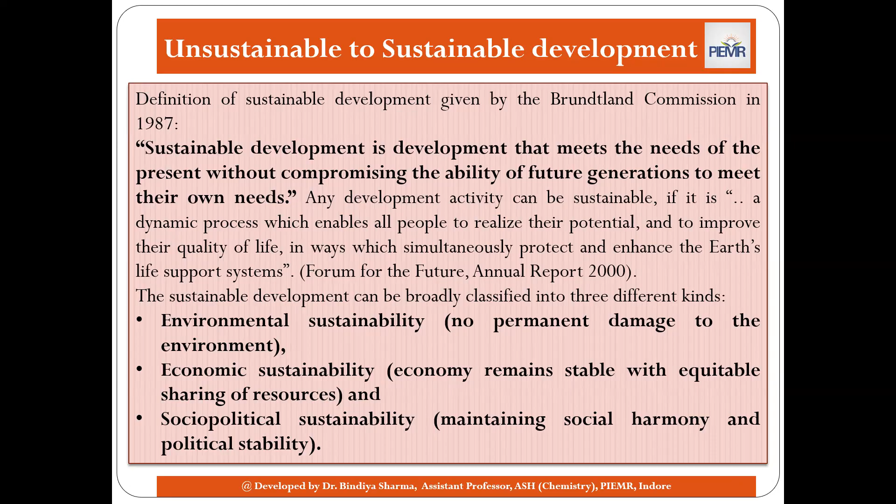Now, when we talk about environmental sustainability, there is an urgent need for water conservation, as the world faces an increasingly critical need to address climate change. The impact of water conservation on a sustainable environment is undeniable. We cannot deny that we have to conserve the groundwater and the water available to us on earth. Groundwater is a primary source of fresh water.

It caters to the growing demand of industry as well as domestic use. But it is observed that we are exploiting groundwater resources for our daily needs, and therefore it is declining day by day. We are finding scarcity of fresh water. Though many technological devices are being developed to minimize wastage, our own contribution is needed if we want to optimize groundwater use, especially for day-to-day activities.

So we need to conserve water at an individual level also. Our water resources are depleting each year, and it is not possible for us to generate artificial water. We are still dependent on the natural water available to us as rain. We use so much water, and on earth we don't have much fresh water supply.

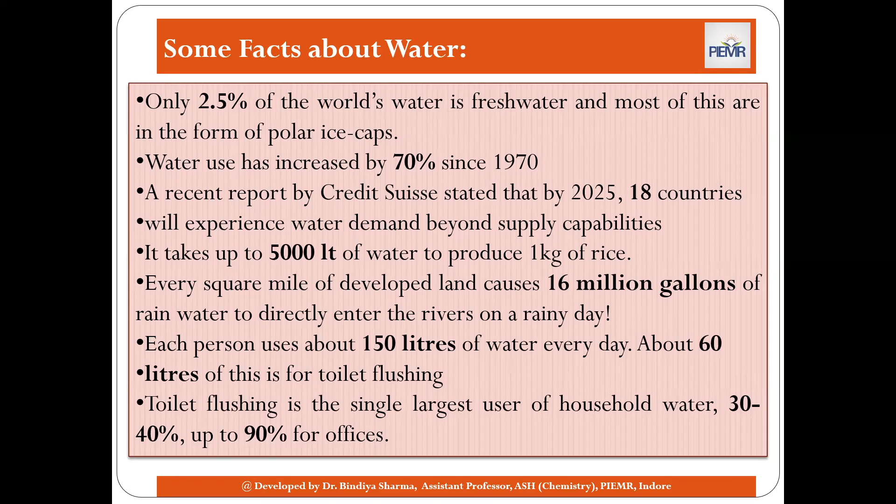Mostly the water is in the form of frozen ice. The water present in the seas and oceans cannot be used directly because it is saline. So we are using so much water and we cannot generate water. Whatever present water resources we have for fresh water, we have to conserve them. Although much water is available to us on earth, we cannot use it. So whatever small percentage of pure, fresh water is available for human beings, we need to protect, conserve, and control its use.

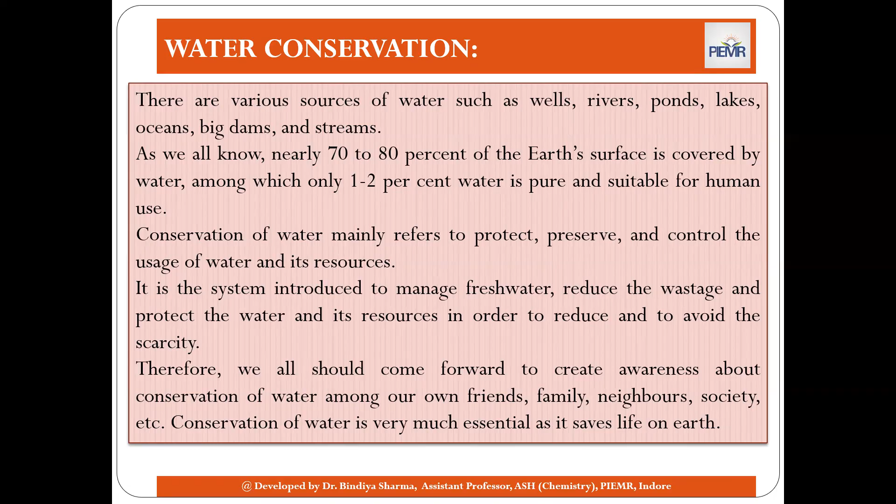And we have to take care of its resources also; it should not be polluted. That means we have to manage fresh water resources. By doing small actions in our day-to-day life, we can conserve water. For example, we should not waste water, and the leakage of taps should be taken seriously and rectified.

We should try to avoid wasting water, and we should try to recycle water and use it for washing or gardening purposes. We should first try to reduce wastage of water and conserve it. As long as we need water, the same amount of water should be judiciously used.

So even farmers, for their irrigation land to grow crops, require water. They can also use some techniques which help to conserve water.

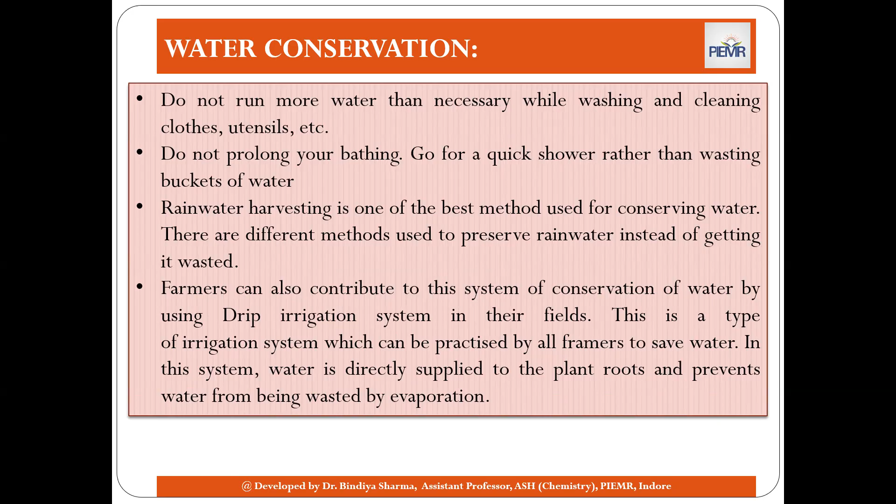This is a term called rainwater harvesting. Rainwater harvesting is a strategy by which rainfall is gathered and stored for future use. This process involves the collection and storage of rainwater with the help of an artificially designed system that runs off the natural catchment area.

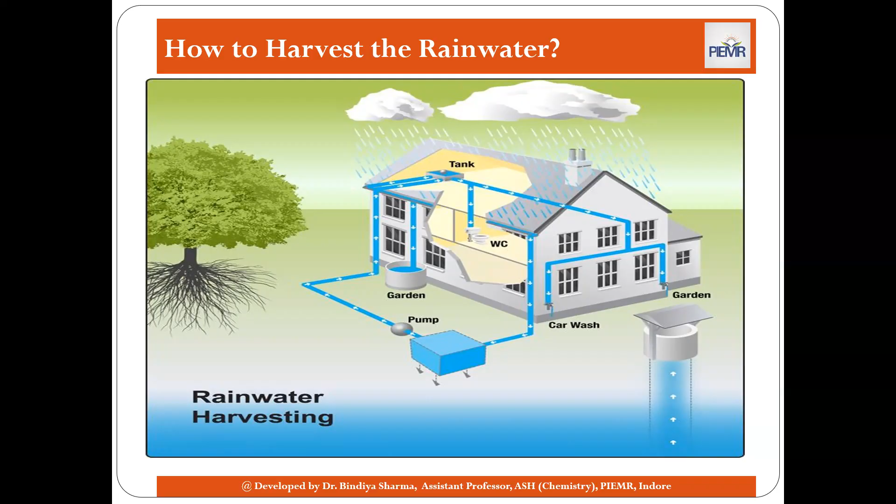For example, the rooftop — mostly water flows from rooftops, rocky surfaces where water cannot be absorbed, or some kind of semi-pervious land surface. The collected rainwater from all these surfaces can be filtered, stored, and later utilized. In simple terms, we can say that we are recharging the water. So if we can recharge or harvest the rainwater, it becomes easy for us to use it in the near future.

Rainwater harvesting is a very smart process because it does not contain any kind of impurity. It does not cost us more, and it is a no-maintenance process which can be easily done, even at our homes.

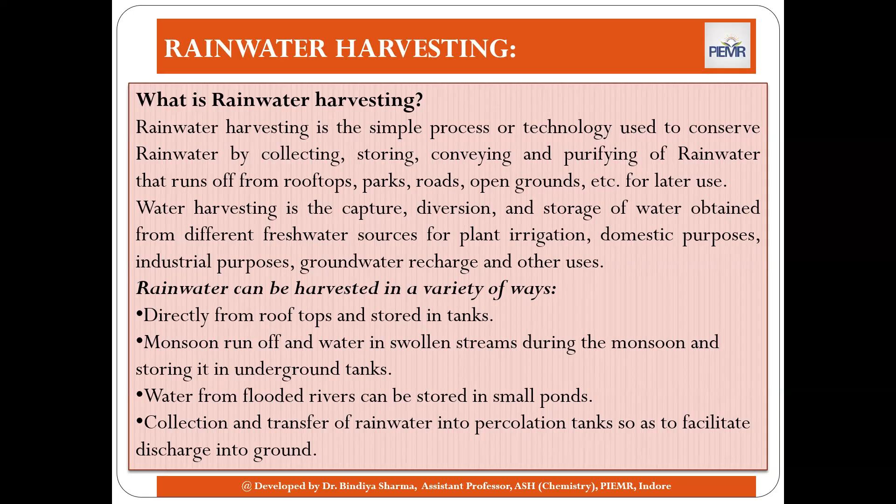Rainwater can be harvested in a variety of ways, like directly from rooftops or some kind of catchment areas. Monsoon runoff and water from flooded rivers can also be harvested and stored. Similarly, from percolation tanks, water can be stored and then discharged into the ground. This image depicts how we can harvest rainwater in our homes.

These are all the collecting areas. Finally, from all the collecting areas, through a common pipeline, during rainfall season the water is stored in a storage tank, and then it is let into the recharge facility, where a pit is dug deep inside.

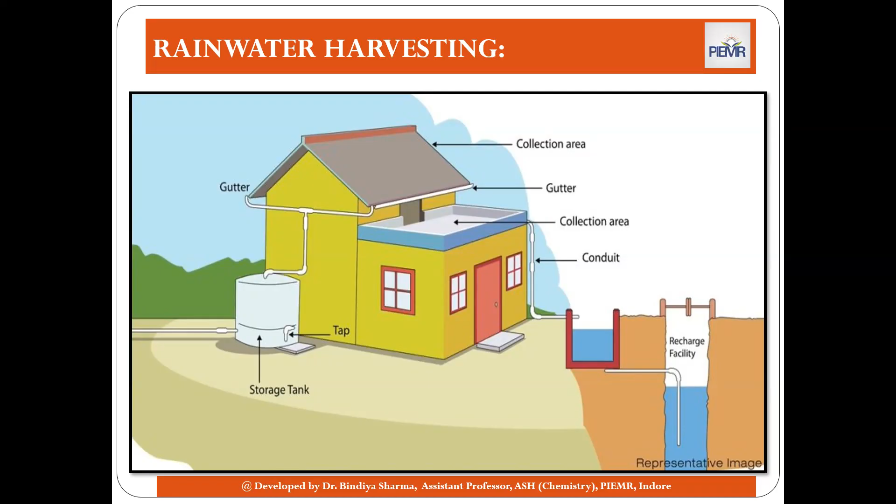Because of this kind of rainwater harvesting, the underground water is always maintained, whereas generally we are losing underground water, and the shortage of underground water can easily be seen during summer season. So these are a few of the principles of water harvesting and conservation.

If we want to manage water effectively, here are the steps we can follow. One is the use of rainwater - we can effectively use rainwater, as we have discussed, even at our homes through the water harvesting process. Storage techniques will give us availability or supply of water in summer season. These are a few techniques by which we can use rainwater effectively through rainwater harvesting.

We can also make effective use of soil water reserves. In the irrigation process, we can use some contouring practices which will help conserve water. We can avoid runoff of water through plantation of trees, by the process of contour pits, bunds, etc. We can also avoid wasting water through evaporation, that is, from barren land.

From the barren land, if the rainwater penetrates deep inside the earth, then the underground water level will always be maintained. But if it does not penetrate and simply gets wasted, then we face scarcity of water. We can also use drip irrigation, which will avoid wasting water during irrigation.

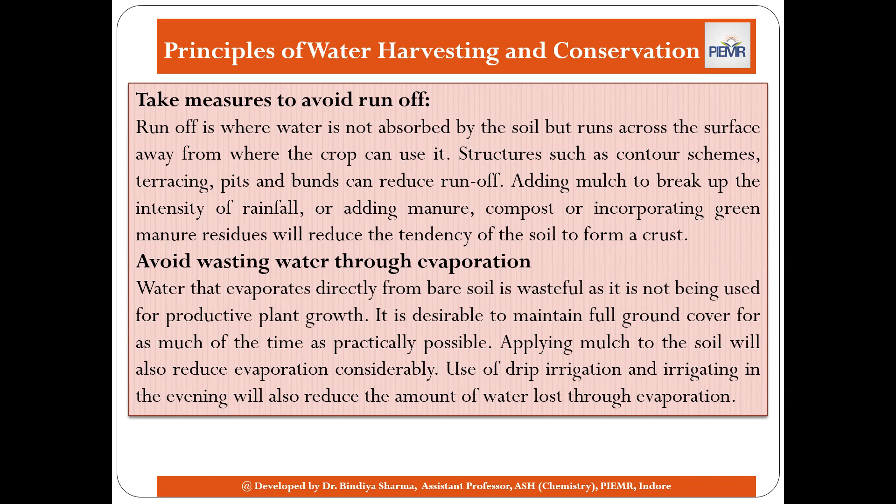We can also reduce water losses through drainage. If we maintain our drainage properly, we can reduce water loss. When the soil is sandy, it is not capable of absorbing much water. So in order to maintain soil fertility and convert sandy soil into fertile soil, steps can be taken. This is how we can conserve water.

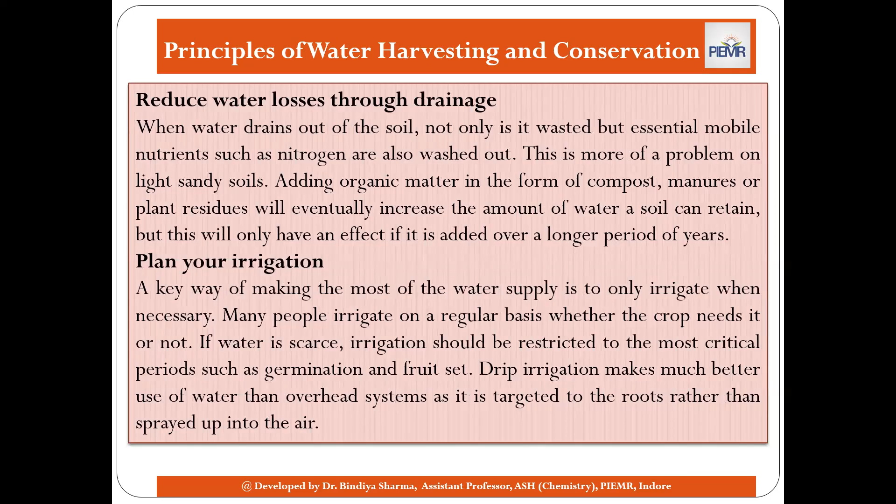If proper irrigation facilities or planning of irrigation is done, much water wastage can be avoided. Let us see how. Now, let's look at how we can plan irrigation.

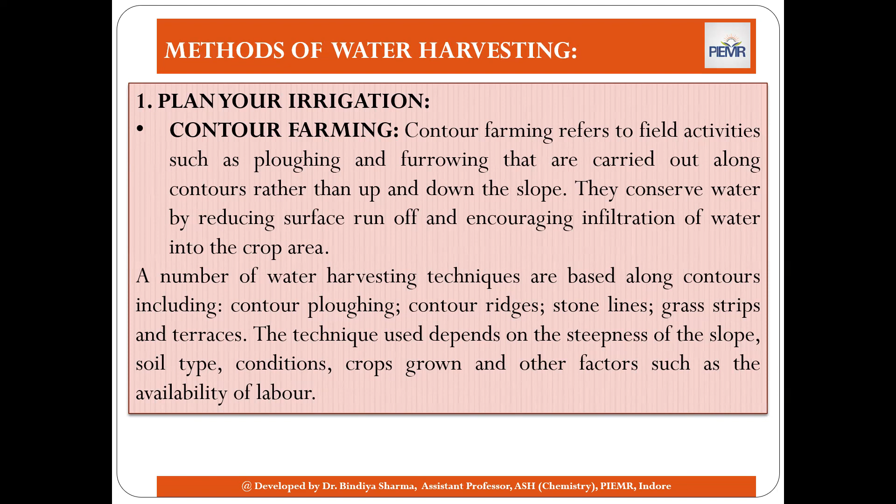First is the method of contour farming. Contour farming refers to field activities like plowing and furrowing which are carried along the contours. By this process, we can conserve water and reduce surface runoff in irrigation land. Some methods related to contour farming are contour plowing, contour ridges, stone lines, grass strips, and terrace. Let us see how contour farming can be carried out.

We can also form retention ditches where flowing water can be collected. We can also have contour furrows where runoff water will not cause wastage and can be easily collected.

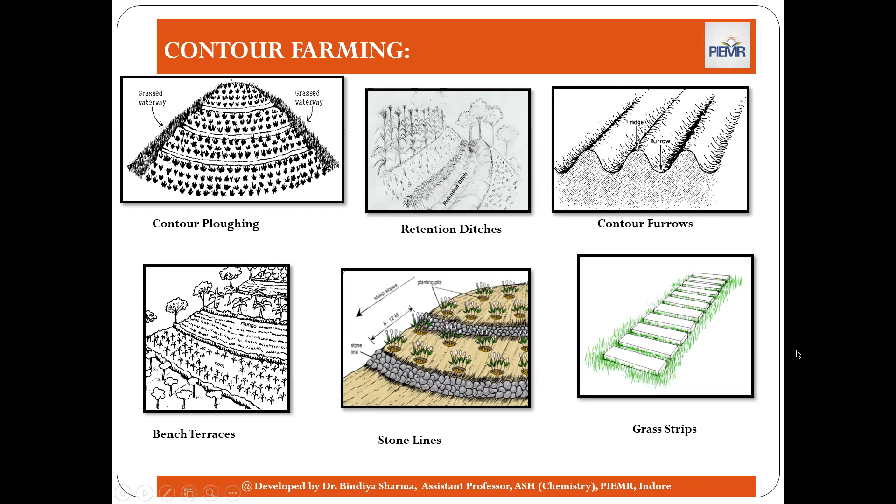We can also have bench terraces, a kind of step farming where we can grow a wide variety of plants and trees. We can also go for stone lines, having a boundary of stones so that water is not wasted and runoff can be prevented. We can also use grass strips, especially in areas like gardens, so that more water will be absorbed.

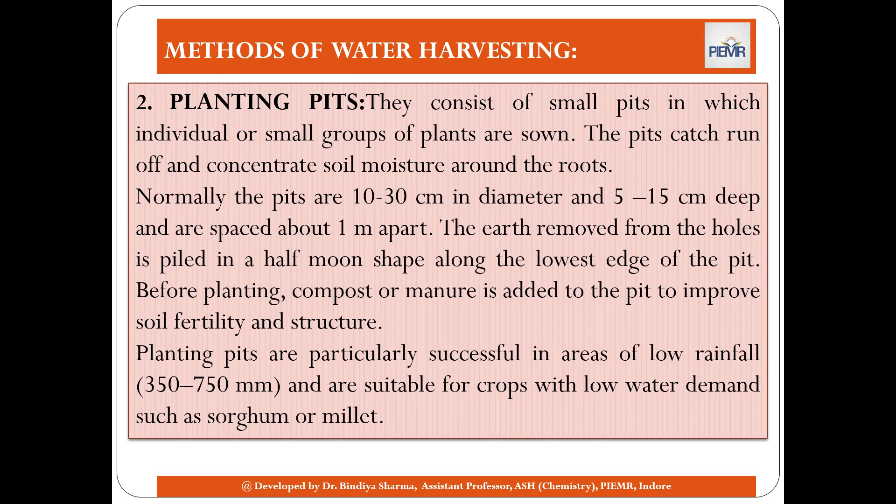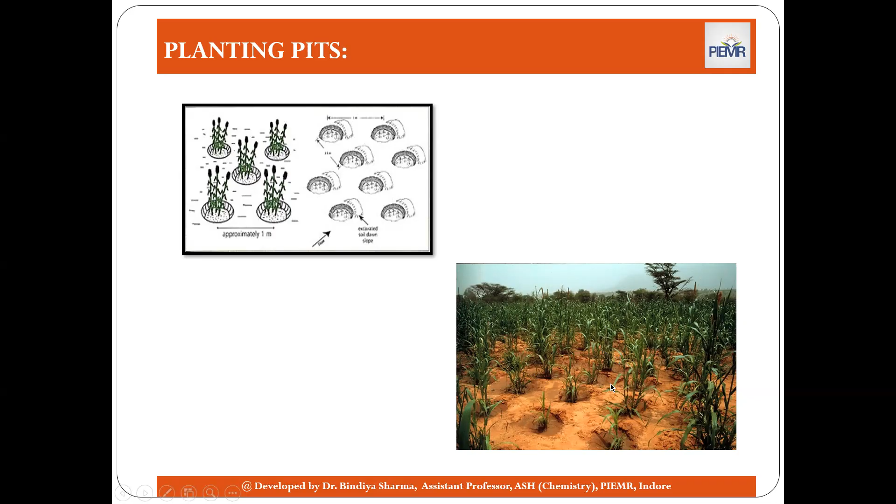The second method includes planting pits. They are small pits, individual or in small groups, where plants are sown. These pits are particularly successful in areas facing low rainfall and are suitable for crops like millet. This is how planting pits are formed and used for irrigation.

The next method is the earth basin.

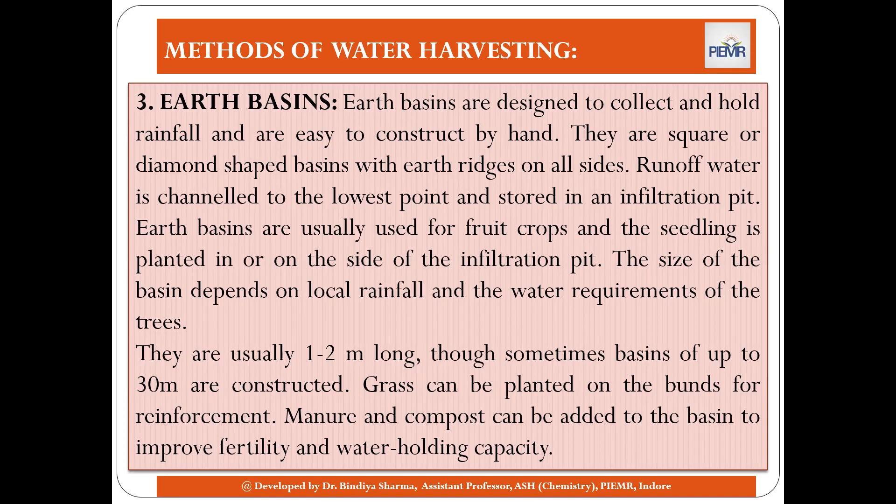They are designed to collect and hold rainfall water and can easily be constructed in whatever shape we want, especially square and diamond shaped basins. They are usually 1 to 2 meters long and range up to 30 meters. Grass can be planted on these basins, and manure and compost can also be added to improve fertility and increase water holding capacity.

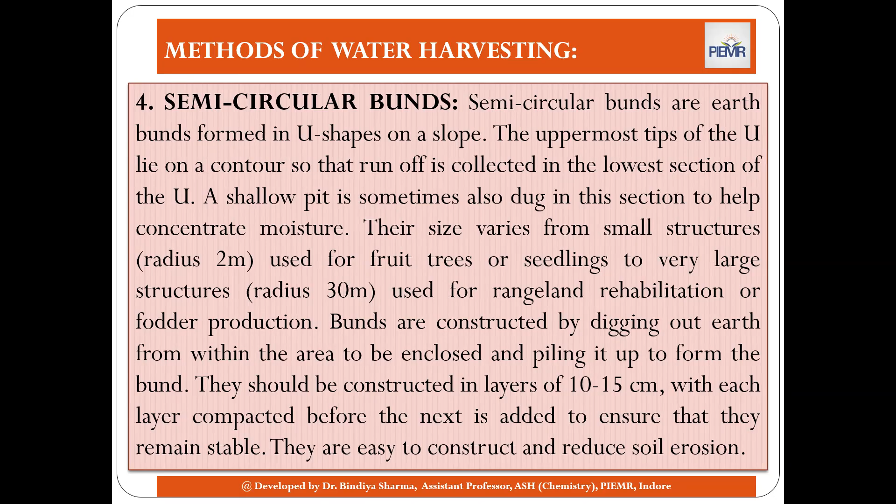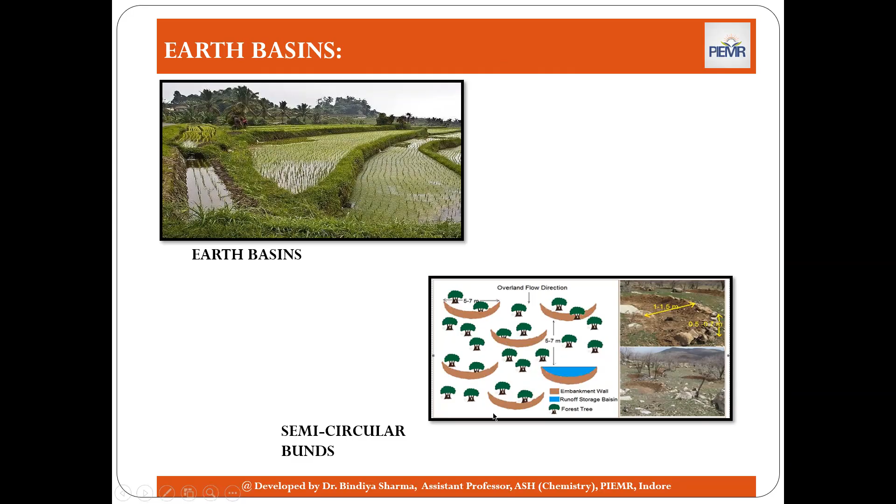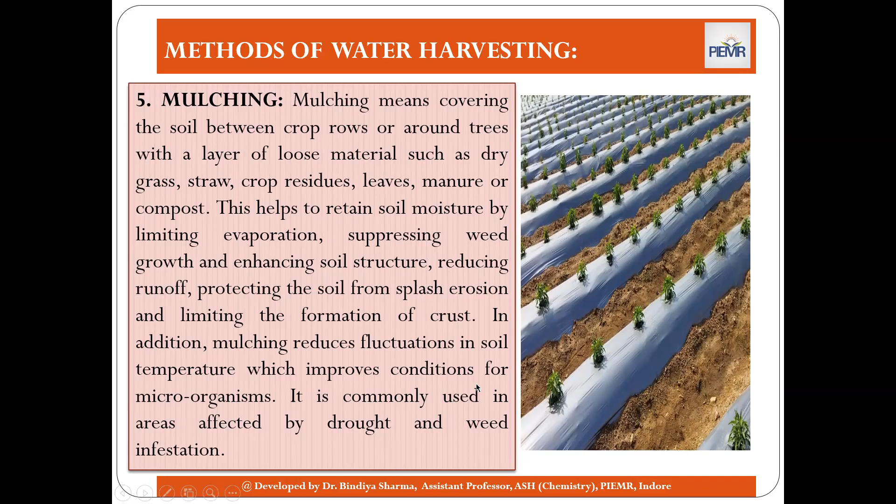Next method for water harvesting is mulching. Mulching means covering the soil between crop rows or around trees with a layer of loose material like grass, straw, leaves, manure, or compost. By doing mulching, it retains soil moisture because it won't allow much evaporation to take place. It also improves soil structure, reduces runoff, and protects the soil from getting eroded. This image shows how mulching can easily be done in irrigation land.

One common and very important technique used for water harvesting in irrigation is drip irrigation. It helps conserve water as water seeps slowly out of small holes in a pipe placed on the soil surface. The holes are located very close to the plant so that not much water is wasted, and the wastage of water can easily be avoided by using a drip irrigation system.

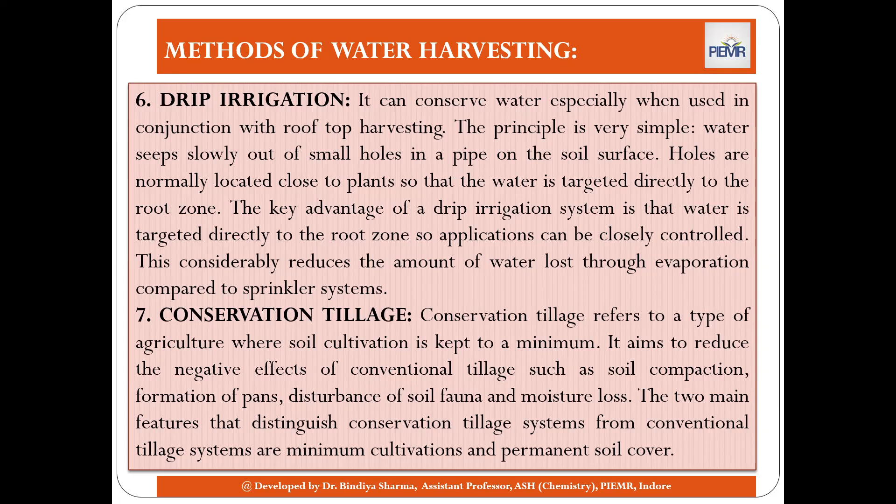Coming to another method of water conservation or rainwater harvesting, it's rooftop harvesting. We have already discussed this, but let us see again how it's done. All the catchment area through a common pipeline collects rainwater, which is sent to a storage tank, and later used for distribution.

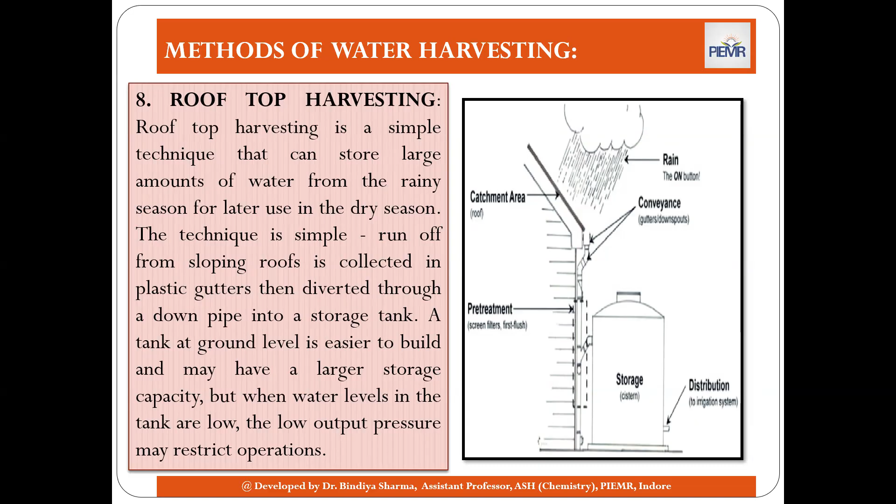We can also treat the water if we want to store it. Some kind of filters can be installed, and the water can be easily stored and utilized later. So the rainwater that normally runs off can be prevented from being wasted, and conservation of water can be done. These were the techniques or methods for rainwater conservation.

Now let us look at a few advantages of rainwater harvesting. It is of wide advantage. First of all, it reduces water bills, and it also has ecological benefits, which are very huge. It minimizes the impact of flooding, and additionally minimizes the possibility of rivers drying up, which is a problem being faced now.

This problem is very common nowadays; rivers are getting dried up. It reduces erosion and flooding around buildings. It is also an adequate means for irrigation purposes, because rainwater is mostly the pure form of water. If we can somehow collect and utilize that water, we will be solving the shortage of water problem, and it reduces the dependency on groundwater if we can do these rainwater harvesting techniques.

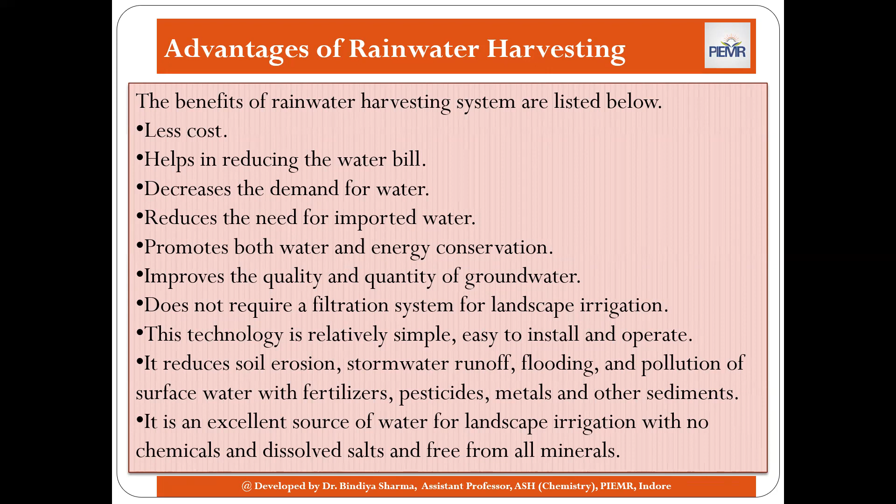But there are a few limitations also. Whenever opting for some practices for rainwater harvesting, regular maintenance has to be done, and some technical skills for installation are needed. We are not sure about the supply of rainwater mostly, and sometimes waterborne diseases can also occur because of that.

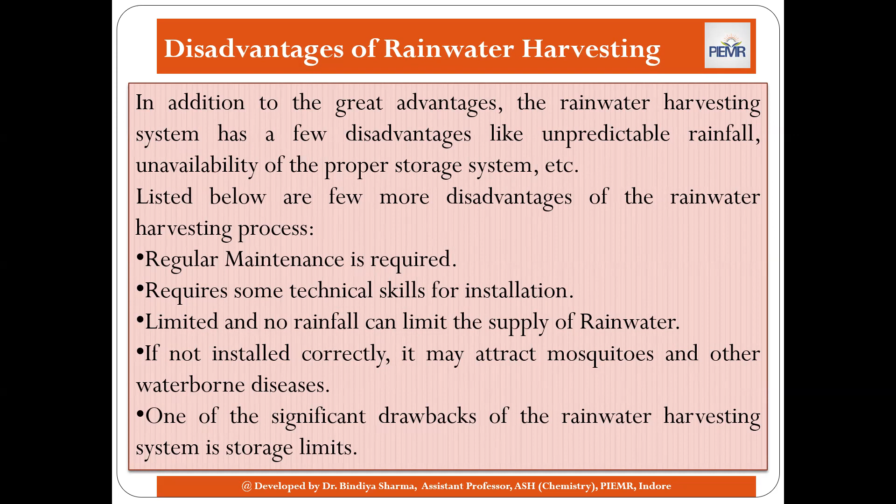But if we compare advantages over disadvantages, we can easily conclude that rainwater harvesting is a very good process which can easily be done by an individual also, in order to conserve water. So that's all for the topic.